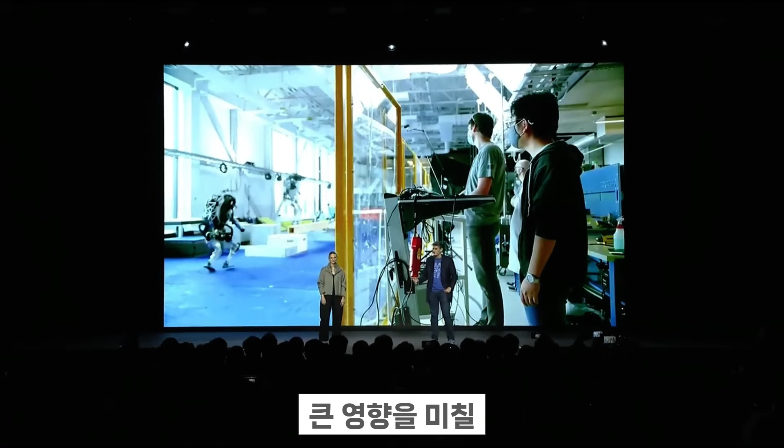I've been designing, building, and programming robots for my entire career, and I've never been more excited about what's next than I am right now. We're on the cusp of a transformational shift that will be as impactful as the smartphone.

Earlier, you saw a pretty cool dance performance from our Spot robots. Spot was our first product, but the Spots deployed with customers don't have time to dance. Those Spot robots collect data, reduce downtime in industrial facilities, and keep people out of harm's way. Over the past 5 years, we've deployed thousands of Spots to hundreds of customer sites in over 40 different countries. Spot is a serious commercial success.

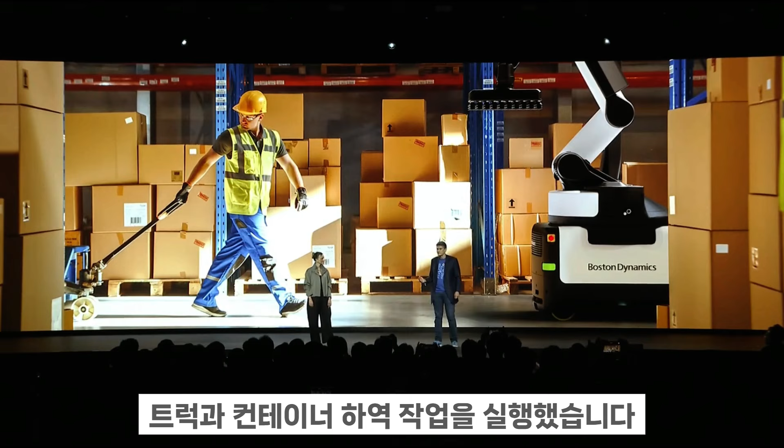We launched Stretch in 2023 to bring total flexibility to warehouse automation, starting with truck and container unloading. This is a back-breaking task done in sweltering heat and chilling cold. Stretch has now unloaded more than 20 million boxes for our customers. These are real examples of how the robots that we build make workplaces safer and people more productive.

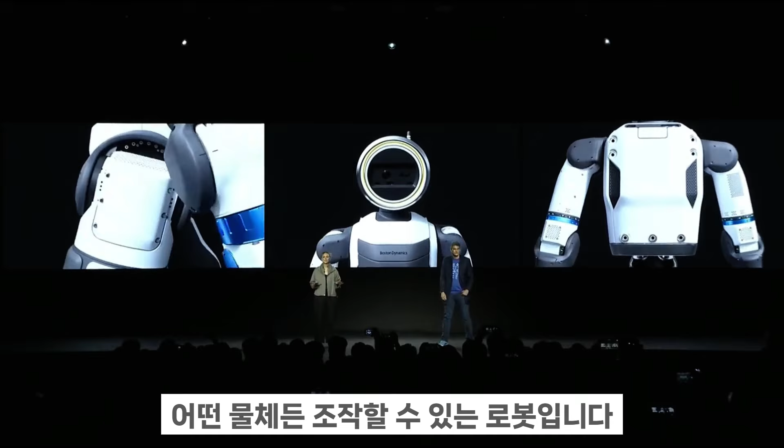So what's next? Our vision is a humanoid that is general purpose, that can go anywhere, understand its surroundings, and manipulate any object. We're starting in industrial environments first. We're building a tool that can drop into your facility as it exists today, and doesn't just do one job, but is flexible enough to evolve as your business changes.

Over the last few years, we have visited hundreds of customer sites, walking the floors with the people who understand their operations best. And we've learned that to bring Atlas from a prototype to a product, it needs to be safe, reliable, and predictable. Atlas needs to be doing the jobs that are repetitive, exhausting, and increasingly difficult to staff.

And as we did with Spot and Stretch, we are partnering with the best in the business, and we're learning directly from the people who will use our products most.

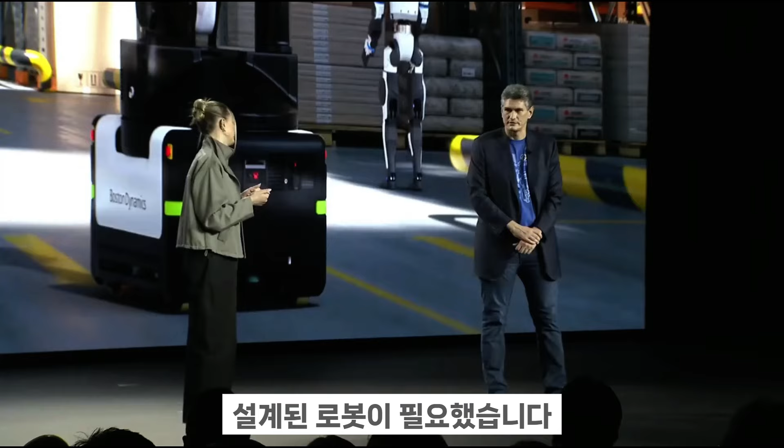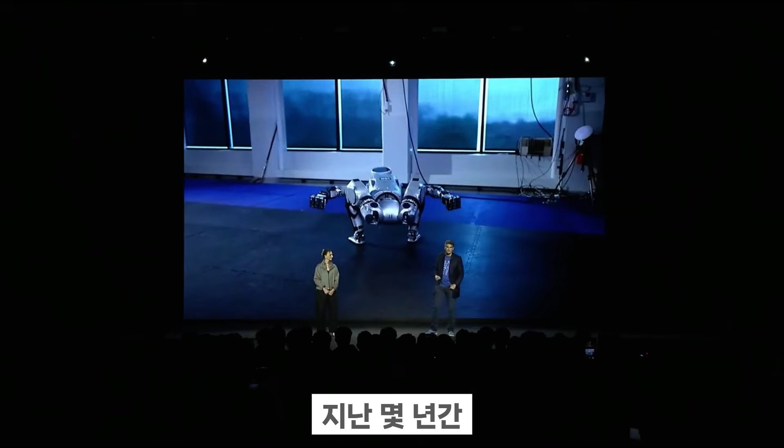But to realize this vision, we needed a robot that was built for the rigors of industry. We've been working on humanoids for more than a decade at Boston Dynamics, always keeping a close watch on when the missing pieces of technology would fall into place to make it truly commercially viable. The rapid advancements in AI over the past few years are the piece that we needed, and that moment is finally here. Now it's time to officially take Atlas out of the lab.

So for the first time ever in public, ladies and gentlemen, please welcome Atlas to the stage.

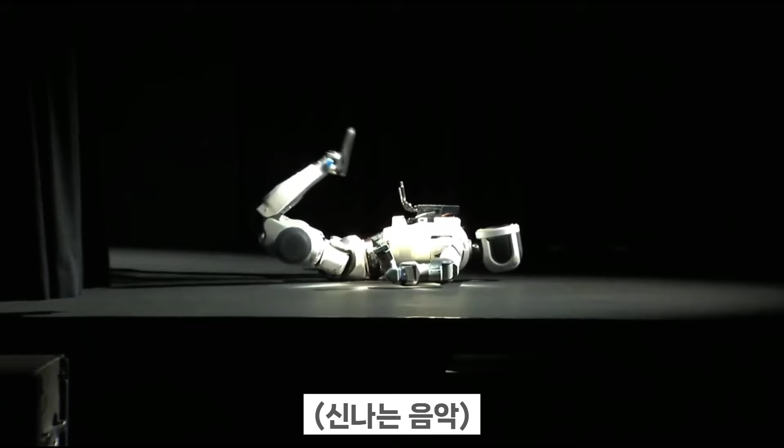As you can see, Atlas really does stand up the way that we show in our videos online. And we get tons of questions about this.

Zach, while we have everyone here, do you want to provide a little bit of insight into how we made that decision? I mean, it's pretty simple. Atlas doesn't have to move like a person does, and we're looking for the most stable, efficient way to get up. And it turns out this is it.

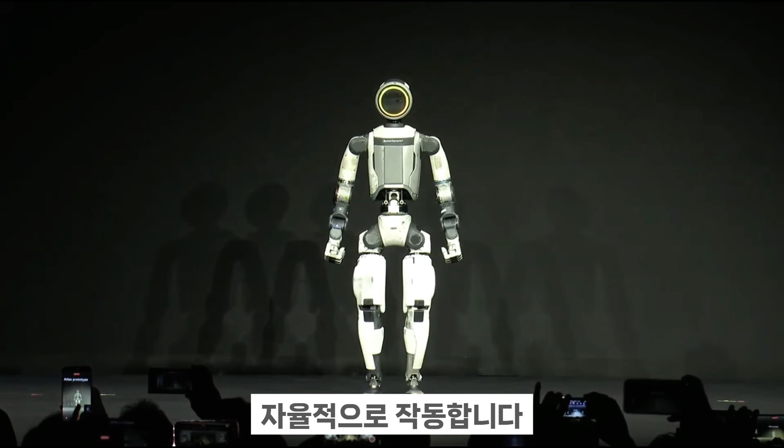The other question we get all the time is how Atlas is moving. How is Atlas moving today? So in normal operation, Atlas is fully autonomous on a job site, but today, Sarvesh, one of our FAEs, is piloting Atlas on the stage, giving it really simple instructions like forwards and backwards, just to keep things simple.

This is Atlas's first time in public, and as you can see, its walk is pretty natural and pretty smooth. We've partnered with our sister organization, the Robotics and AI Institute, to push the limits on natural walking just for this performance, and I think we've done something really special. We've also been at this robotics thing for a while, and we've learned that there's more to it than just copying nature. We can pick the best parts of what nature has to offer and do better in others.

As you can see, Atlas here has joints that can move 360 degrees. This lets Atlas move even more efficiently than humans, particularly in manufacturing environments where every second counts. We've also designed Atlas's head and face very purposefully. We want folks working with Atlas to know that Atlas is a helpful robot, not a person.

Seeing Atlas live in action for the first time is wildly exciting, but seeing it perform real industrial work is even more compelling. We recently took this robot down to the Hyundai Motor Group Metaplant America to have Atlas tested in a real manufacturing facility, where we performed autonomous material handling tasks. We proved that humanoids could be viable in a real-world application, and we collected data and learnings that we took back to Boston to make our product even better. If you would like to see what one of those applications looks like, we will be running live demonstrations all week long in the Hyundai Motor Group booth at CES.

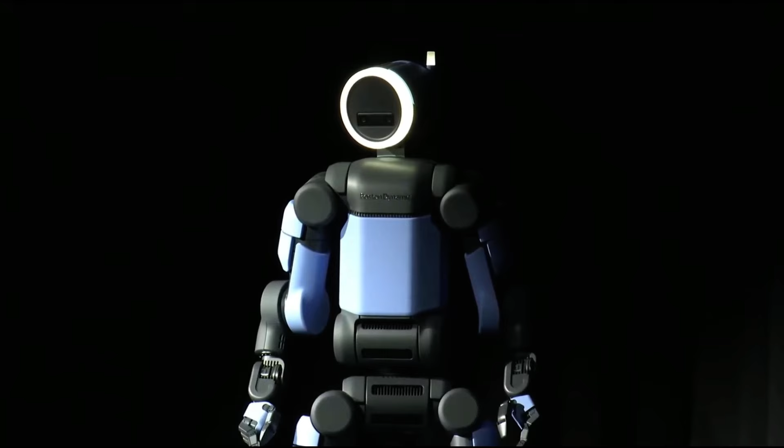Now, obviously, this is a static display robot. We just couldn't pry the actual production samples out of our engineers' hands at the lab this week. So we're going to be showing you videos of that robot in the coming weeks.

This product generation of Atlas surpasses any other enterprise-grade humanoid. This robot has 56 degrees of freedom, mostly with fully rotational joints, and it has human-scale hands with tactile sensing in the fingers and palms for dexterous manipulation. Atlas's 360-degree cameras see in all directions, so it understands when people are approaching, which is part of our holistic safety concept. Atlas is also strong.

It can lift up to 110 pounds and reach up to 7.5 feet in the air. Atlas is also water resistant. In real industrial environments, robots need to undergo washdowns, and it can operate at its full capabilities, including strength, between -4 and 104 degrees Fahrenheit.

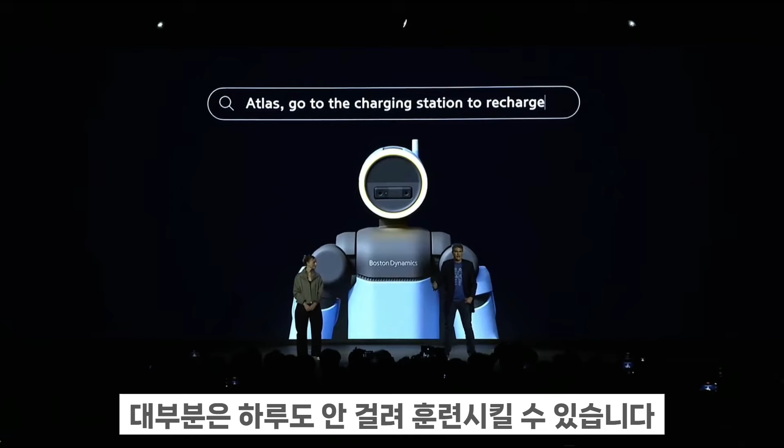It's going to be easy to teach Atlas new tasks. Most can be trained in less than a day. Atlas can perform these tasks at a reliable, consistent pace for about 4 hours using its dual swappable batteries. And when they run low, Atlas navigates back to its charging station and swaps its own batteries, getting right back to work.

Finally, Atlas robots share intelligence. Through our Orbit platform, once one Atlas learns a skill, it can be shared with any other Atlas. These industry-leading specs, along with our industry-leading foundation models, allow Atlas to take on challenging tasks - tasks that Atlas will do autonomously on its own from day one, assisting people and prioritizing a collaborative, human-centric approach. And as we continue to build out our general-purpose technology, our customers will be able to use our Orbit software to teach Atlas new and specialized skills.

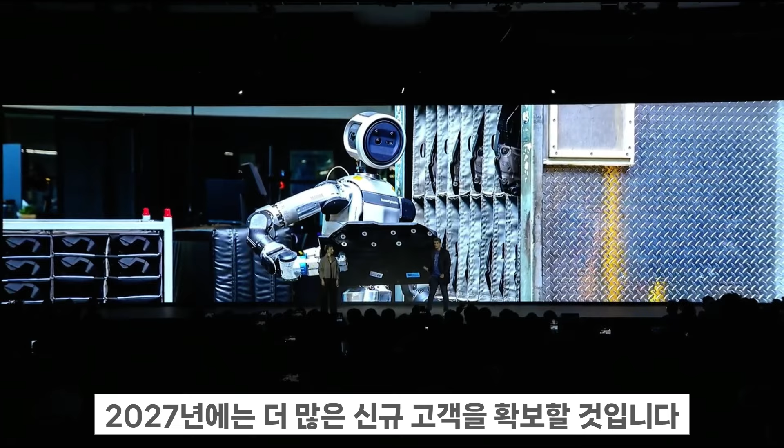Do you want to wrap us up by talking about our production and deployment plans? Of course. So we've already started production of this new robot at our Boston headquarters, and our entire 2026 supply has already been allocated to Hyundai Motor Group and our new AI partner you'll hear about in a few minutes. We'll add more new customers in 2027. But for now, we're planning additional pilots at Hyundai Motor Group and building a facility that we call the Hyundai Robot Metaplant Application Center.

This center is the cornerstone of our plan to build the most complete data set in the world to train humanoid skills in manufacturing, creating an engine for deploying tens of thousands of Atlas robots across Hyundai Motor Group facilities worldwide. It's a data factory. Hyundai Motor Group isn't just deploying the Atlas robots either.

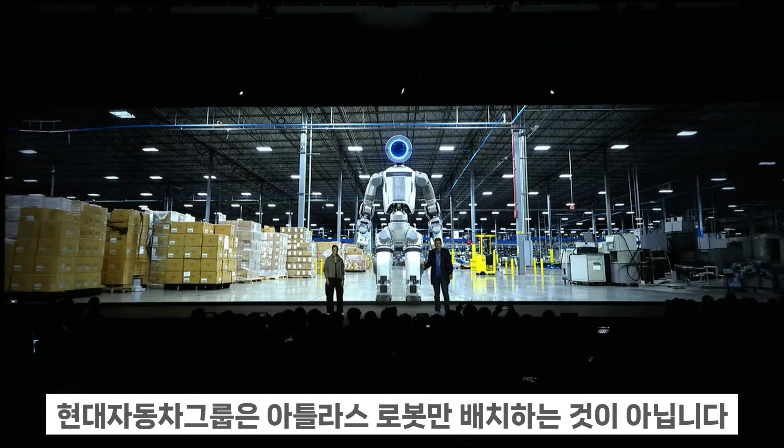They are going to build them. Together, we are building a new robotics factory capable of producing 30,000 Atlas robots a year. This is what's truly required to deliver the full promise of humanoids across the industrial, commercial, and home markets.

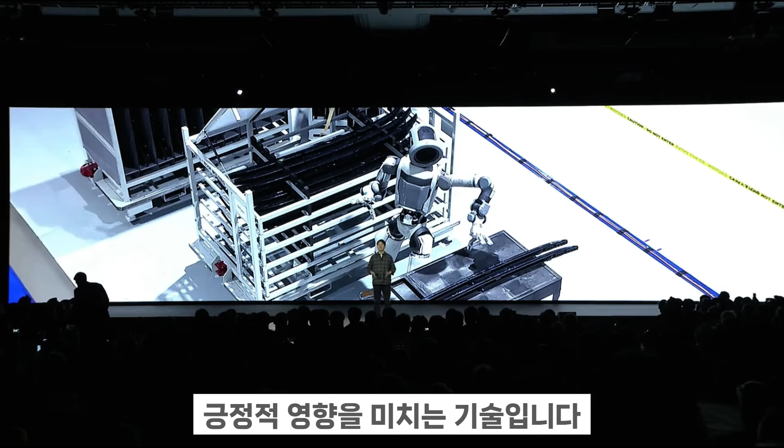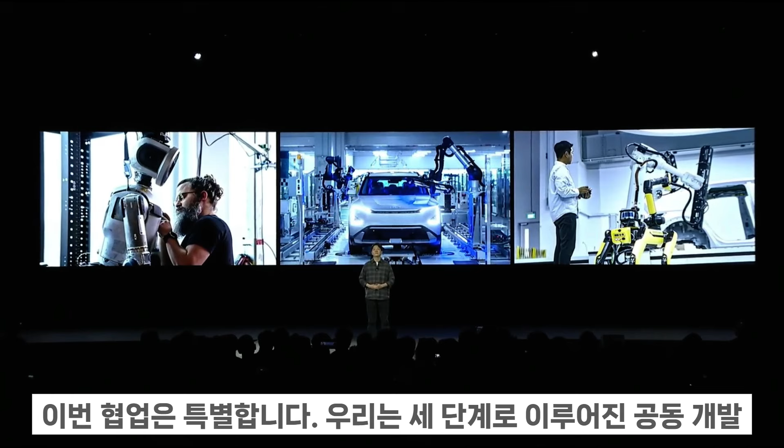We take Boston Dynamics' top research and development with our group's production power. Among all robotics players, this collaboration is unique. Here we follow a shared three-step development approach.

We are speeding up how our robots learn physical skills. We train them on data from Hyundai Motor Group's factories. Turning data into robot motion requires a central engine.

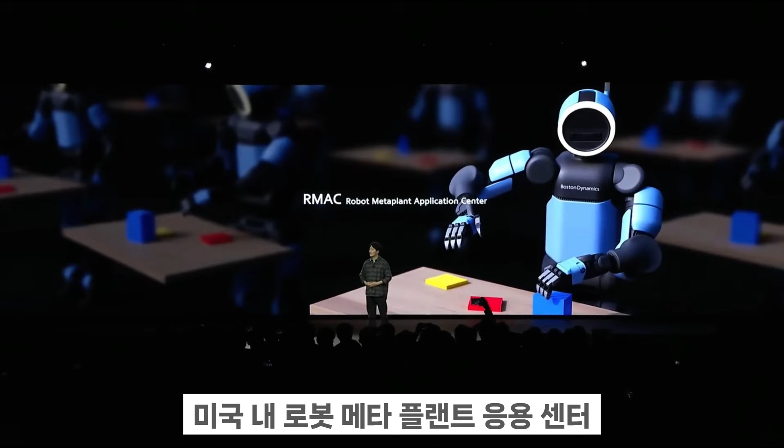That engine is RMAC, the Robot Meta Plant Application Center in the US. RMAC drives robot experimentation, validation, and training. It anchors our robotics business and trains the robotics workforce.

Accelerating physical AI capabilities takes more than a physical hub, it also takes cutting-edge technologies. That is why we partner with cutting-edge global tech leaders. One of these valuable partners is NVIDIA. Their AI infrastructure and development tools help us innovate robots faster, streamline development cycles, and deliver scalable solutions. We are also activating our group value network affiliates and applying their mass production expertise from cars to robotics.

Each affiliate plays a distinct role. Hyundai Motor Company and Kia provide manufacturing infrastructure, process control, and production data. Hyundai Mobis works closely with Boston Dynamics to develop high-performance actuators. By combining their expertise, they're helping standardize key components and build a strong global supply chain for the group's robotics platform.

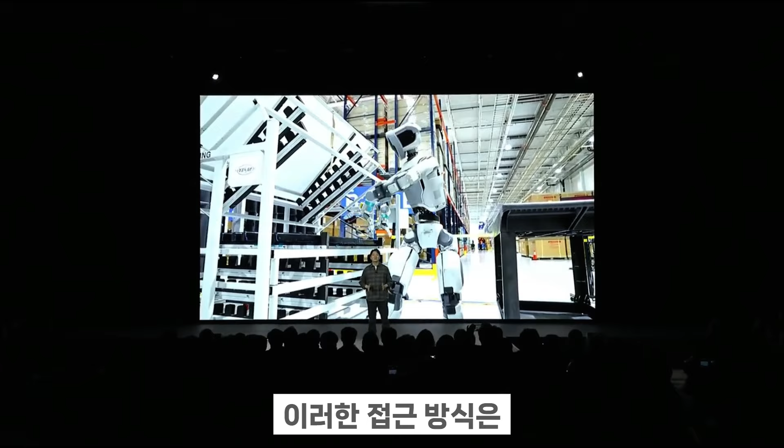And as robots move from the factory into everyday life, this approach will be just as important for people at home, which means robots have to prove themselves in the factory first, then they are allowed to do housework in the home.

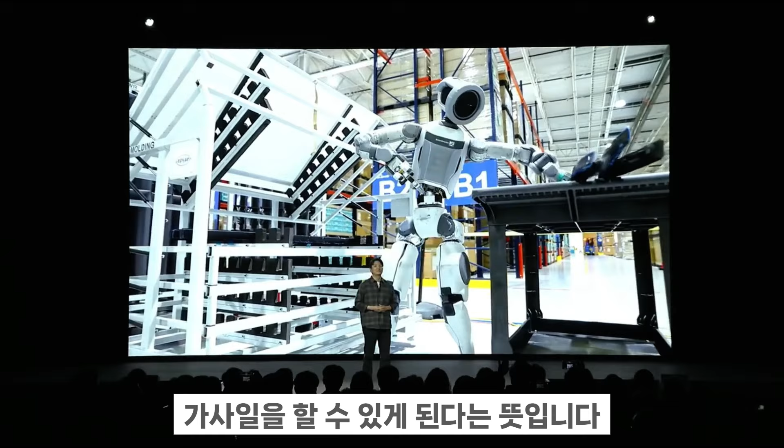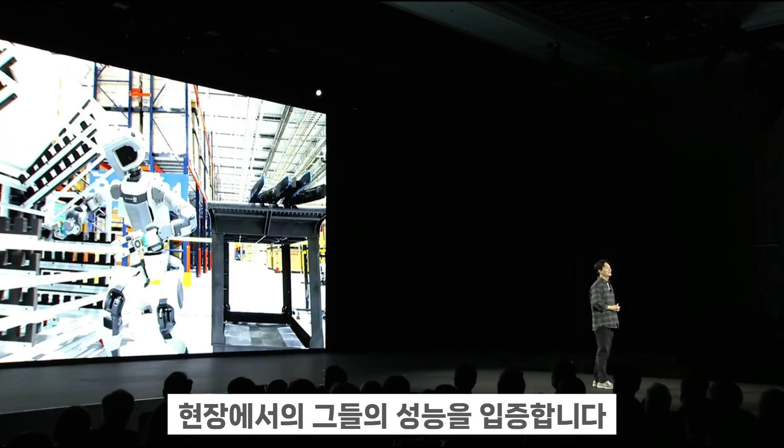Others show staged household robot demos. We prove real performance in industrial settings where every move and every result is measured. That's how we build credibility: proven inside Hyundai Motor Group, expanded to the world.

By 2030, we plan to sell 9.8 million vehicles per year. On that scale, Atlas moved from pilot to mass production, rolling out across our global manufacturing network to support our expansion targets. And the demand will go far beyond manufacturing, like logistics, energy, construction, and facility management, where safe, intelligent, scalable robots add real value.

Today, Spot and Stretch are already operating at customer sites outside Hyundai Motor Group in numerous use cases. In the future, Atlas will play a core part as we expand across diverse industries with a wide variety of applications.

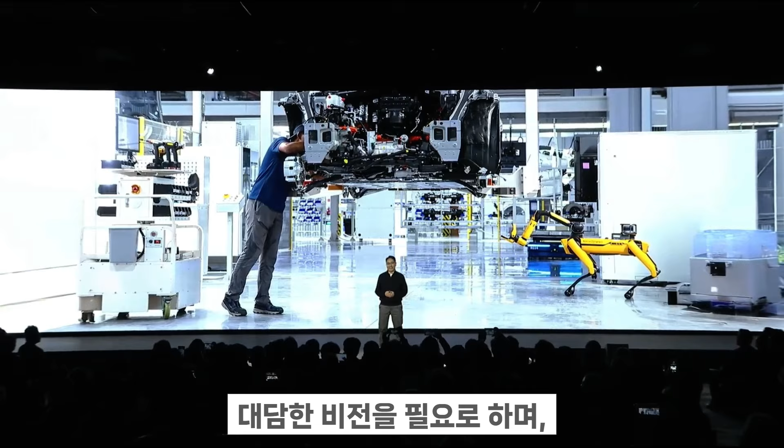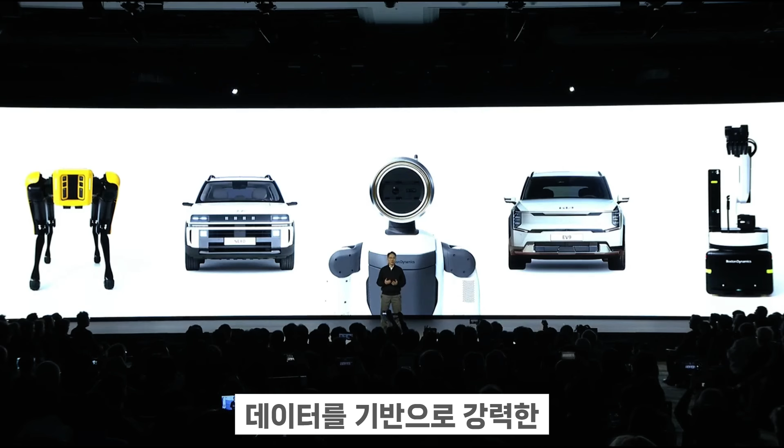Human-centered AI robotics does indeed require a bold vision, and it takes two bold partners to bring that vision to life. Boston Dynamics has world-class problem solvers. Hyundai Motor Group delivers the power of scale in production, and when the two come together, they create powerful impact, fueled by one of the most precious resources of our time: data.

At Hyundai Motor Group, we have a unique advantage. We connect mobility, manufacturing, logistics, and robotics into one integrated loop. This holistic modeling of cross-domain data is changing everything, even factories. We are shifting from hardware-driven plants to software-defined factory, also known as SDF. They run 24/7. They're more flexible, safer, and smarter.

Software lets us update, improve, and share intelligence across our global plant network. That is how Hyundai Motor Group will grow a connected SDF system, each learning from the others, each lifting the whole network. Our first SDF, HMGICS, is already up and running in Singapore. We'll grow from there, connecting data, people, and technology across every plant in the Hyundai Motor Group.

Our SDF roadmap has one goal: achieve the best for our customers. We aim to adapt faster to local demands, raise product quality beyond today's benchmarks, offer better prices through efficiency, and improve employee safety.

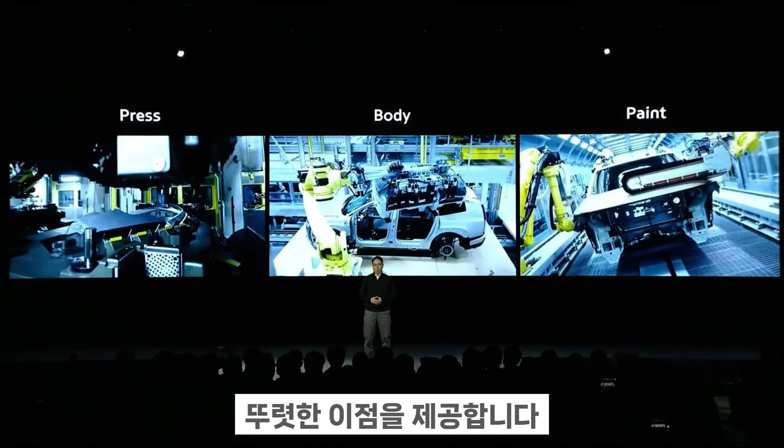SDF is also optimized for better collaboration between humans and robots. Across our plants, robots already handle tough, dangerous, repetitive work. Automation delivers clear benefits in the press, body, and paint shops, where it reaches up to 100%. It promotes productivity, strengthens quality, and most importantly, keeps people safe.

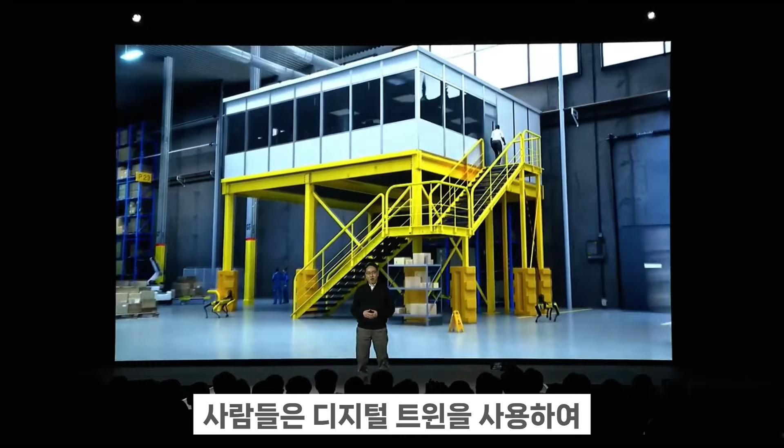It's the unique approach of Hyundai Motor Group, human-centered automation. Even in a highly automated era, people remain essential, supervising, guiding, and maintaining robot colleagues, always retaining full control. As automation grows, the human role will become even more important. Robots will take on physical strain, so people can focus on oversight, decision-making, and problem-solving. People will lead through software, using digital twins to test scenarios, adjusting workflow with data-driven precision.

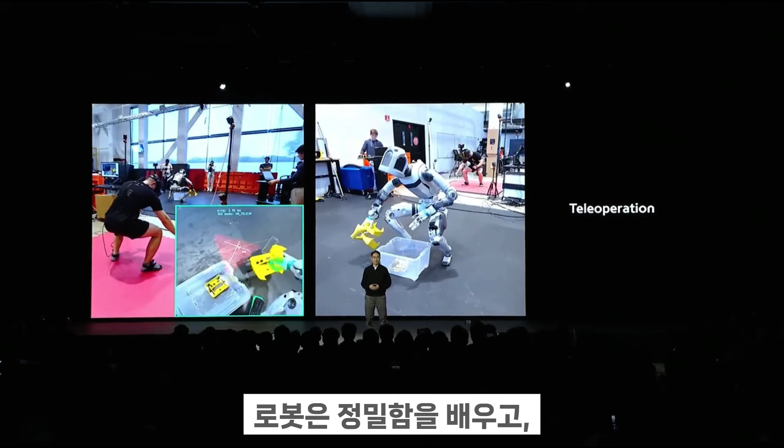But this doesn't happen overnight. The tasks must be trained systematically, safely, and with real-world context. That's the purpose of RMAC, which will be located here in the US. RMAC is where robots learn to work with people. They learn precision, repetition, and safety by mapping human movement into robot learning. Every lift, turn, and recovery motion, all captured as real operational data.

No company has more real-world factory data than Hyundai Motor Group because our SDF network is global and well-connected. This data creates better training. Better training creates safer, smarter robots, and smarter robots create better factories for people. Big input, great output. Our roadmap is clear.

The RMAC opens this August and creates the basis for future robots. By 2028, the Atlas global rollout begins within our SDF network. Atlas will start to perform high-precision sequencing tasks. By 2030, robots will handle complex assembly.

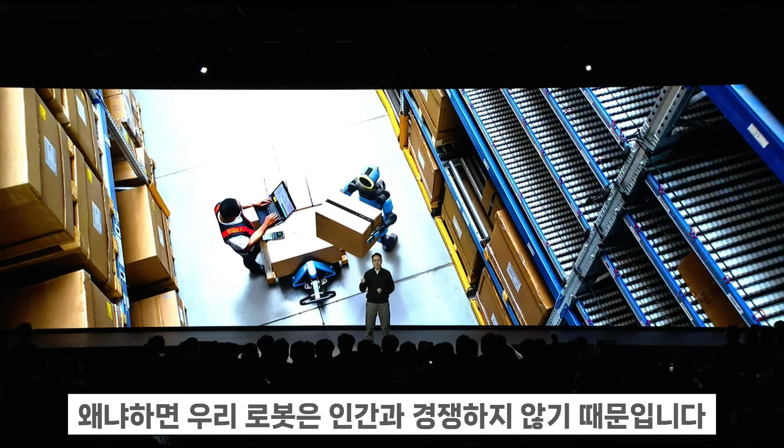Together, with our robot colleagues, work is safer, lighter, and more meaningful. Because our robots don't compete with humans, they compete for humans, for our safety, efficiency, and well-being. This is Hyundai Motor Group's robotics philosophy. Robots expanding human reach and partnering for human progress.

This concludes our look at the manufacturing power of Hyundai Motor Group in AI robotics. To learn how we are advancing this vision, please welcome Boston Dynamics and our new valued partner, Google DeepMind.

Hello, my name is Alberto Rodriguez, and I lead the Atlas behavior team at Boston Dynamics. And I'm Carolina Parada, and I lead robotics at Google DeepMind. Well, Carolina, finally we are here, the last session of this presentation, and I'm so excited to finally be able to announce this. Very excited.

At Boston Dynamics, we've been building humanoids and other mobile robots for more than 2 decades now. And a central focus of our work has always been physical intelligence, imbuing our robots with the mastery of force and motion that has allowed us to demonstrate incredible athletic feats, as well as deploy them in real-world environments where they work for months at a time without failure. And all that work has led us to here, to today, to the new generation of Atlas, the world's most physically capable humanoid robot. But making Atlas into a product requires more than athletic performance.

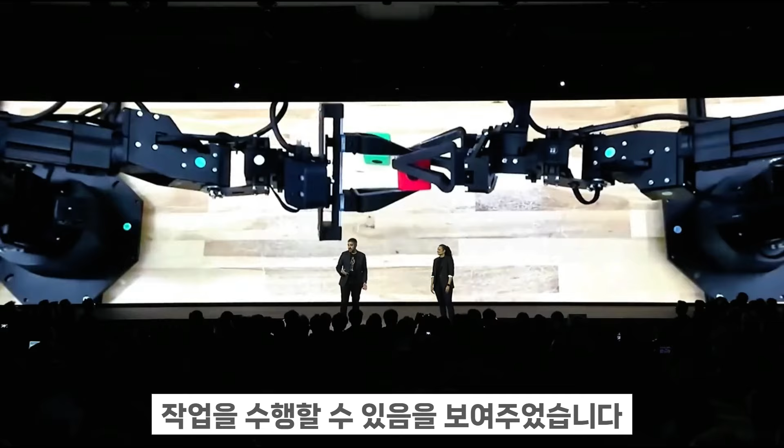The DeepMind robotics team has already shown that robots can generalize to new scenarios and that they can perform manipulation tasks just from simple language instructions. One of the core goals of this partnership is to significantly expand the scope of that generalization to include a much larger set of tasks, complex real-world tasks, like the ones you'll see Atlas performing this week at our booth at CES.

Rather than having a set of predefined loaded tasks onto the robot, we think robots should understand the physical world the same way we do. They should be able to learn from their experience, generalize to new situations, and get better over time. So whether it is to assemble a new car part or to tie your shoelaces, robots should learn the same way we do, from a handful of examples, and then get better very quickly with a little bit of practice.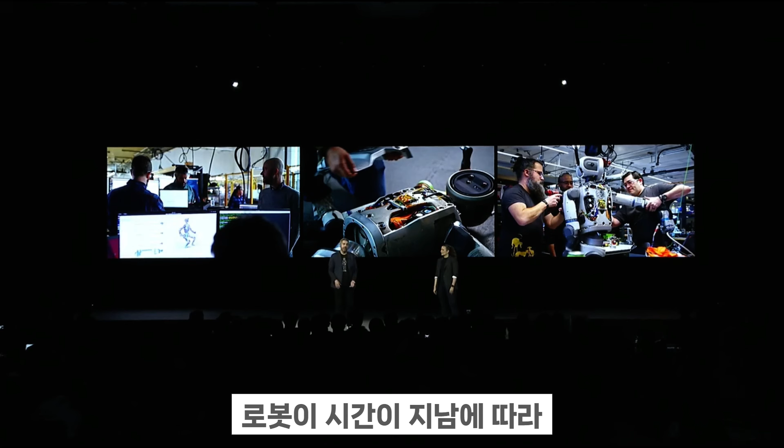And building these models is critical, both for reliability and scale, right? The ability to easily onboard new tasks, or the ability for our robots to improve their performance over time on their own, or to be able to react to any unexpected things that the world puts in front of them, are all key to successful large-scale deployments of this technology.

Robots should be able to onboard new tasks in one day, and they should be able to perform those tasks for hours on end. And we think that Atlas, with its endurance, with its strength, and its unique mobility, gives us an opportunity to even go beyond human performance in many cases.

So how do we get there? Well, we're currently building a very large fleet of Atlas robots, and soon we'll start deploying them both in Boston Dynamics offices and in Google DeepMind's labs across the world. So stay tuned for more information to come. We're very excited about pulling our teams together and getting to work.

So that brings us to the end of today's presentation. Today marks an important first step on the path towards AI-enabled humanoids that deliver real-world impact. As robots move from industry to our daily lives, they will have to earn our trust through safety, reliability, and performance. Human-centered AI will make our lives easier and safer, and ultimately more fulfilling.

Together with Hyundai Motor Group, with our AI partners, and with all of you, we have the opportunity to shape a future where humanity and robotics thrive side by side. Thank you for being here with us today. Please join us on this journey to see what partnering for human progress looks like in action.